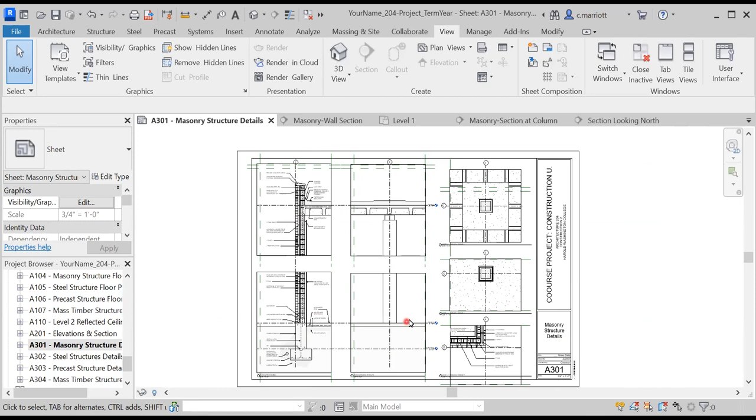In this video, we are going to work on this detail here, the section at the column. It won't have nearly as many notes and components and detail as the wall section, so this shouldn't take quite as long.

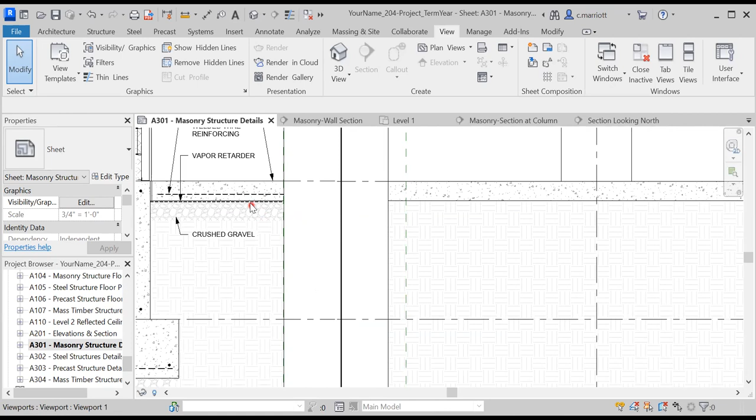Some of the things we're going to do are bringing that welded wire mesh across and adding the reinforcing that appears in the waffle slab. Same thing goes for the bottom, we'll pull across the gravel, vapor retarder, and welded wire reinforcing that's in the slab. We'll also show the pier beyond. It's already drawn, but it's hidden behind the topography, so we'll make that into a hidden line. There will be maybe a few notes, but not many for this one.

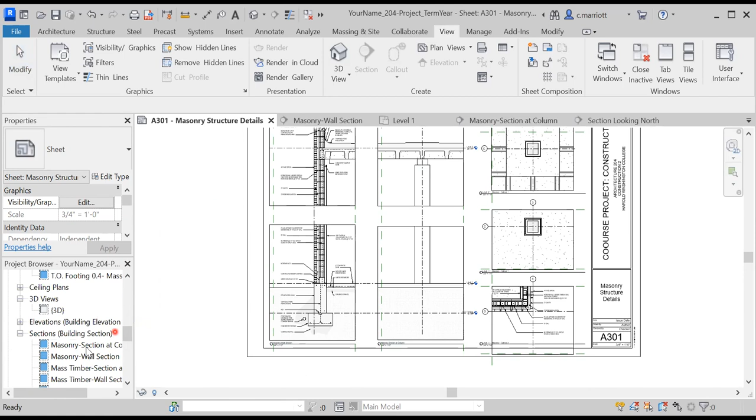So I'm going to go to the section at the column. Actually, before I do that, let's go to the wall section here, and maybe we'll try to copy a few elements from this view and see if we can just bring them right over. I'm holding down the Control key.

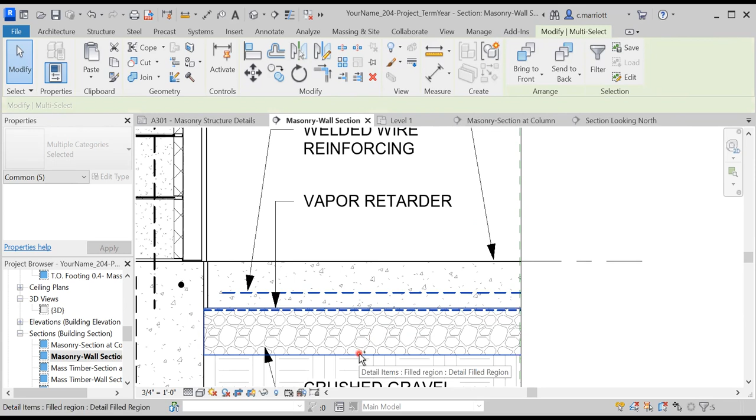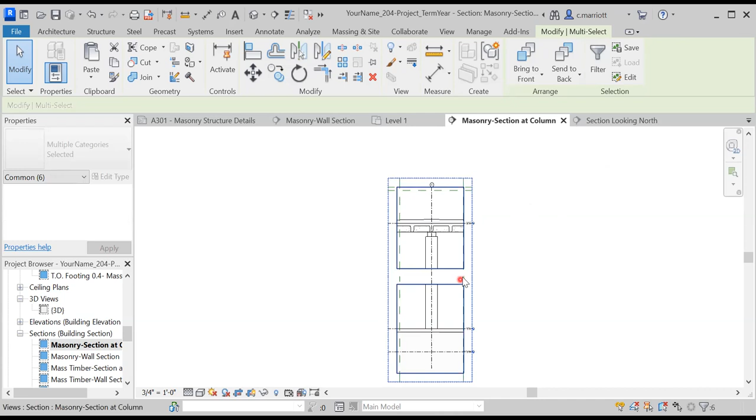Control C, and we'll try to move that over to this other detail, Control V. So they may be here, but they're hidden behind. I'm going to try to paste them into the detail right here. Okay, there they are. Now I can move them into place. That will save me a little bit of time.

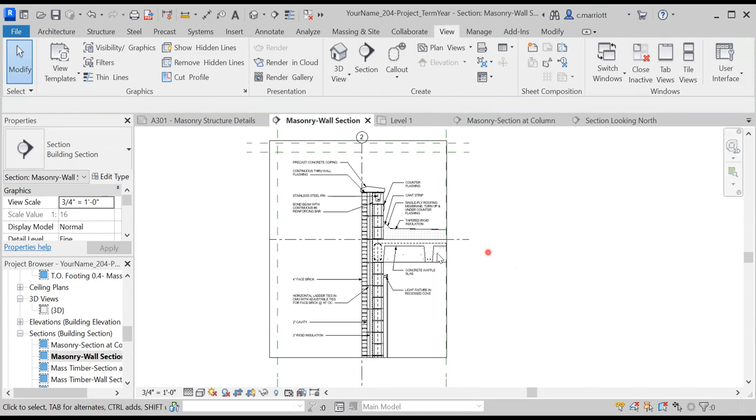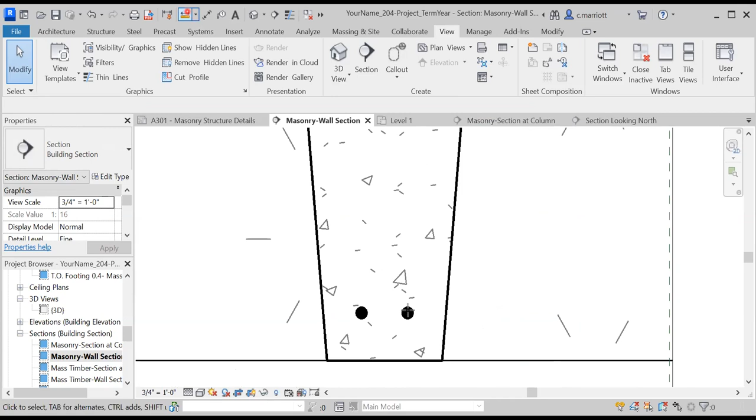I'm going to go back to the wall section and just check some dimensions to make sure that I'm placing them in the same positions. So let me measure that again. Snap overrides perpendicular. I put them 2 inches above here, and we can check this as well. I think it's the same, 2 inches.

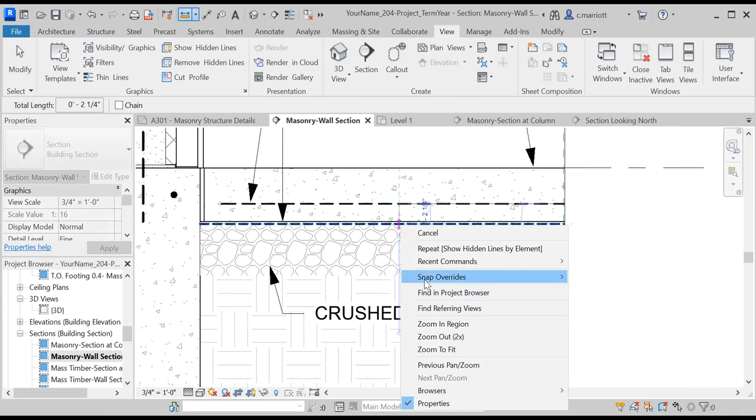And I will check my welded wire reinforcing down there. That's also going to be 2 inches. Okay, so now I'll go back to the section at the column and I'll move these into place.

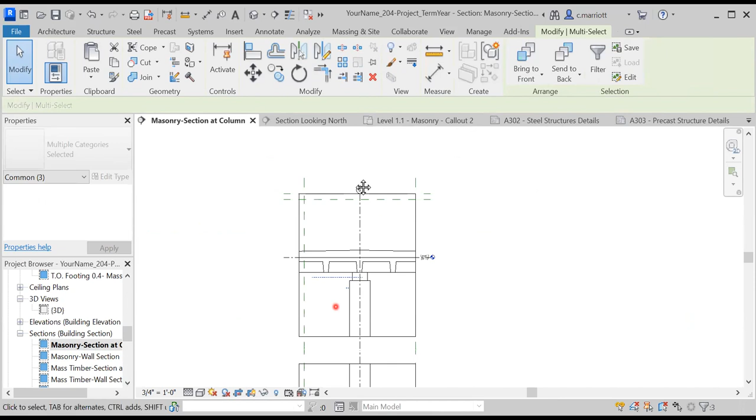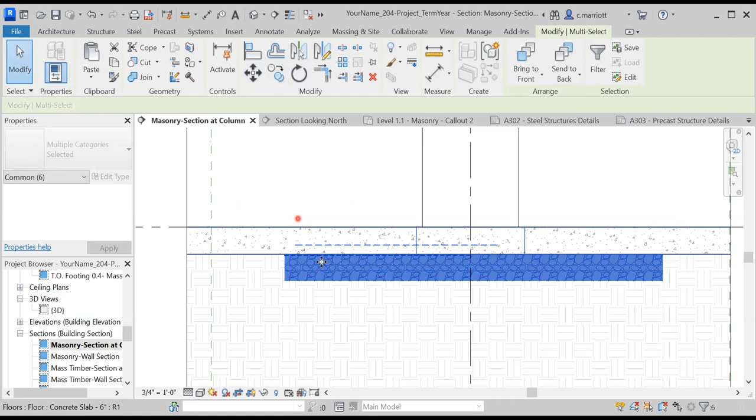So let's see here, maybe I can do them all at the same time. If not, I'll come back and pick them up individually. Okay, move from endpoint, snap overrides to perpendicular, and then I'll move them again 2 inches up. Now I should be able to stretch these past the crop lines.

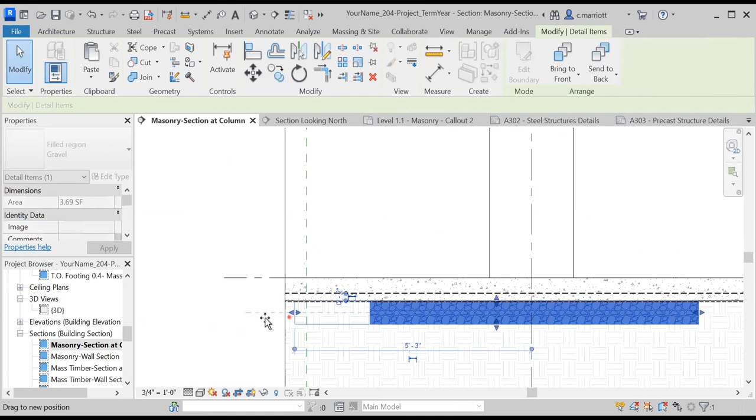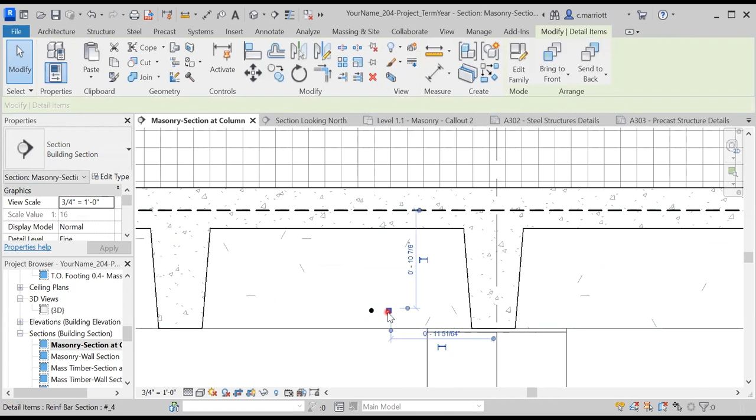Going up to the top here, now we repeat that process. Reinforcing. Move. Moving them to column.

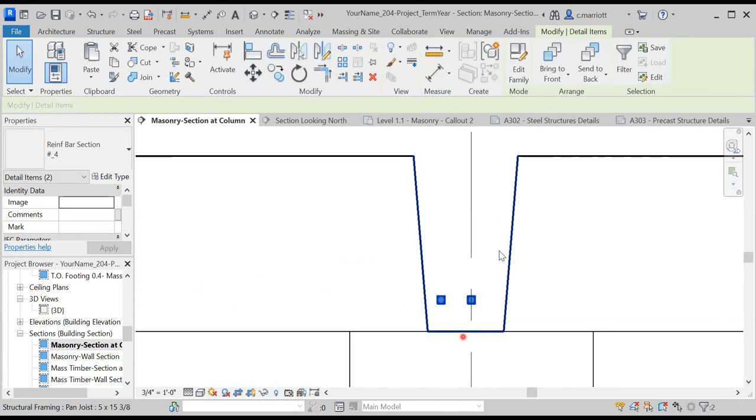For some reason, my member here is not centered, so I'll have to figure out what the problem is with that one. See if I can move it from here. I'll have to unpin it and work on that.

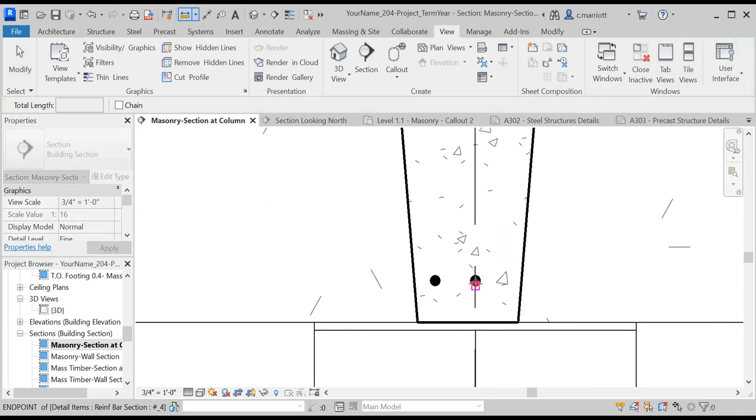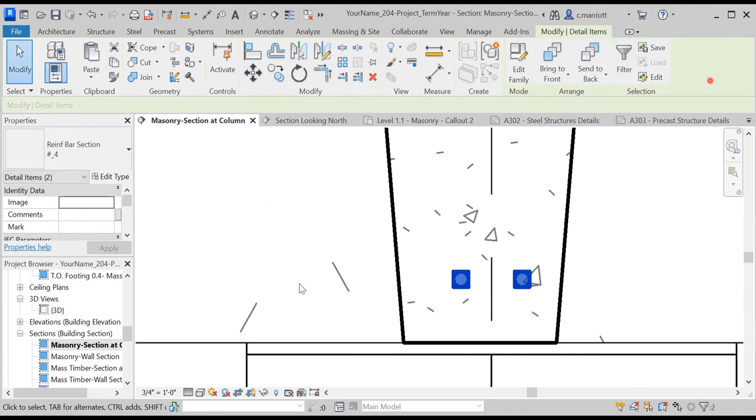Okay, let's measure between the two. Let me pick a center. So I'll just move them over 1 inch so they'll be centered on the column line. And I'll come back to that business about centering the actual structural member properly.

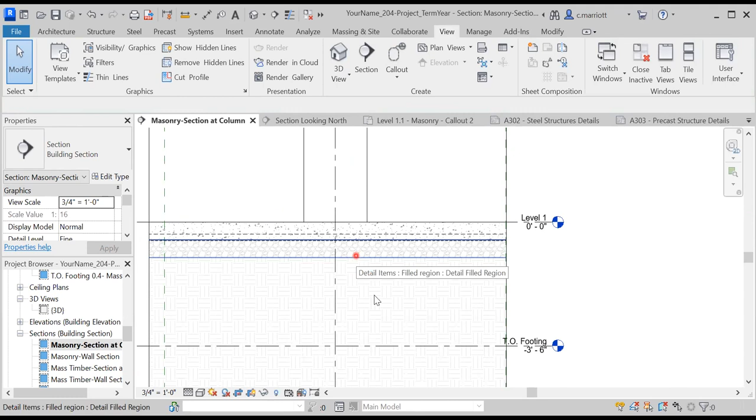Okay, next thing we're going to do is reveal some lines that are hidden. We have a pier that's coming down below this column, and we want to see that as a hidden line. The steps for this are a little bit complicated, but once you get the hang of it, hopefully it will go quickly. First thing I'm going to do is go to a wireframe view.

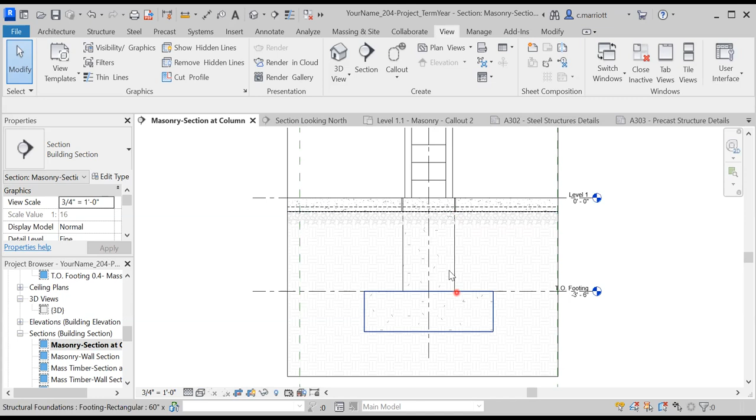Okay, so now I can see everything. So that's what I'm going to show, but I don't want it to be a continuous line, I want it to be a hidden line. So the process is this: you go to the View tab, and under the Graphics panel, Show Hidden Lines.

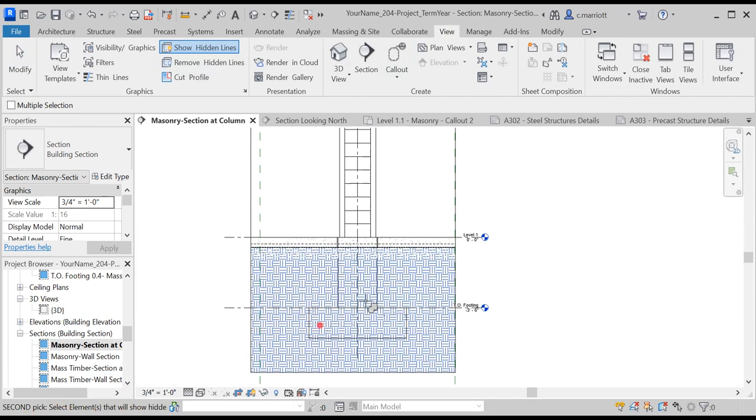So I'll start off with, see if I can tab through and select the topography. I think that's the topography, yes. You pick that first, and then second, pick the element that will show. So I can select this pier, okay? And then when I go to the hidden view, I can see that it's now visible.

Now, as you can see, I need to go through the process of revealing those hidden lines behind the gravel fill and also the slab, and I'm also going to reveal the footing. So I'll go through that process again.

I'm going to go back to the wireframe mode, show the hidden lines, and hit tab until I hit select. Okay, I'm not sure what it picked, so let me repeat that. Show hidden lines, and I need to - okay, detail lines, that's what it's found.

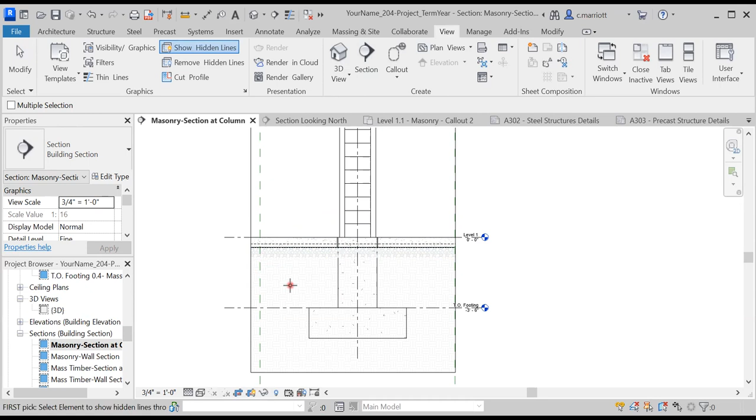If I hit tab again, let's try. It's a little bit of a challenge to pick. Let's try the detail lines first, and I'll reveal this. Okay, so I'm going a little bit out of sequence, but now you can see it's going through the gravel. I'll just finish this one, and then I'll figure out how to select that topography in a moment.

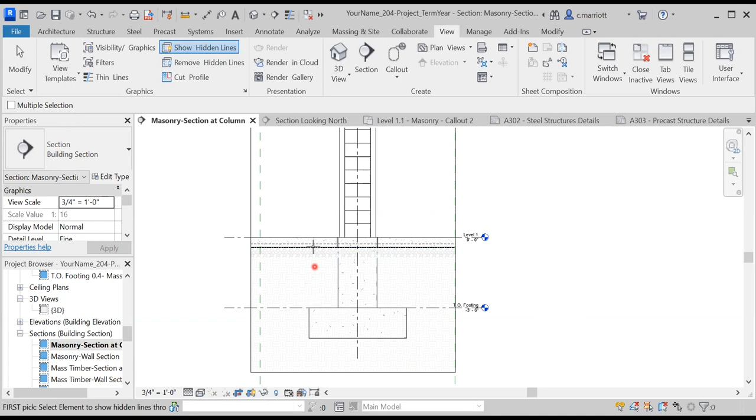But let's see here, View, Show Hidden Lines. Let's go back to the wireframe first. Okay, View, Show Hidden Lines. I'm going to select the concrete. Now I'm going to select the pier. And then when I go back to hidden line, I should see that those lines pull through.

So in order to pick this footing, if I had done this first before I had brought the gravel in, it would have been a lot easier to do. It's not letting me select the topography. So what I'm going to do first is click on that gravel layer, hide that element in the view, and then I'll turn it back on.

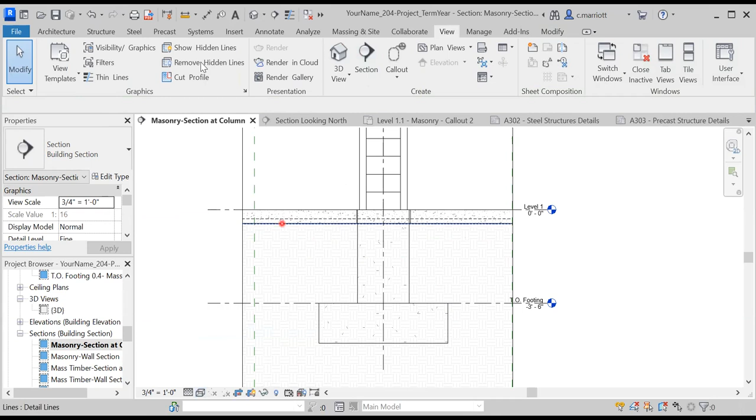All right, so I'm still here in wireframe, and I'm going to go to Show Hidden Lines again and see if I can tab there. There's the topography. No, that's not the topography.

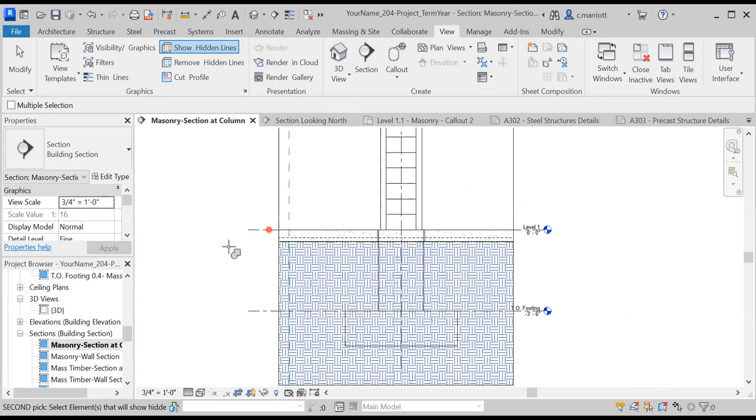Hidden line, concrete slab, topography. There we go. Like I said, a little tricky to grab that. And then I'm going to pick the footing down here.

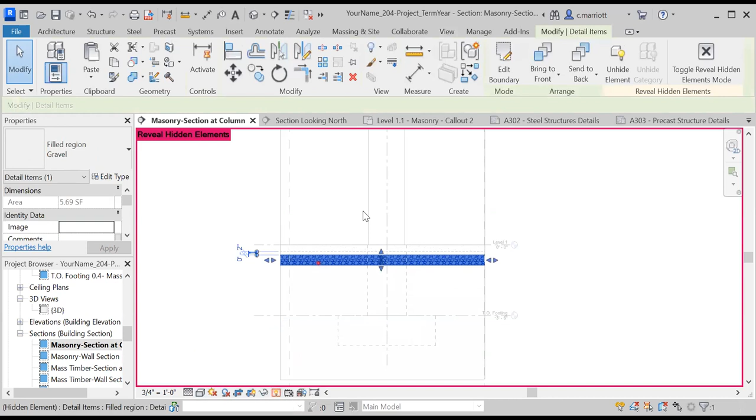Now when I go to the hidden lines, they should appear. And then in order to turn back on the gravel, I'm going to reveal hidden elements by clicking on that little light bulb, select that and unhide element in view. And then I'll deselect that light bulb. Now I can see that those hidden lines are coming all the way down the pier.

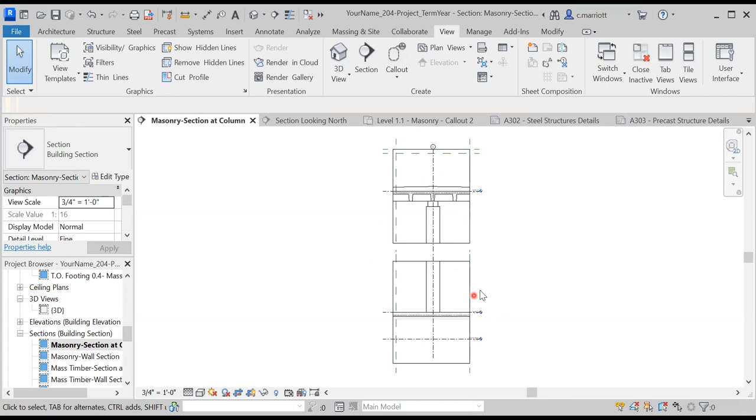Now for this detail, I suppose we could have cut the section through the column itself, but I think enough information can be shown from the exterior of this particular view. So the other thing that I'm going to show is the concrete block behind the drywall.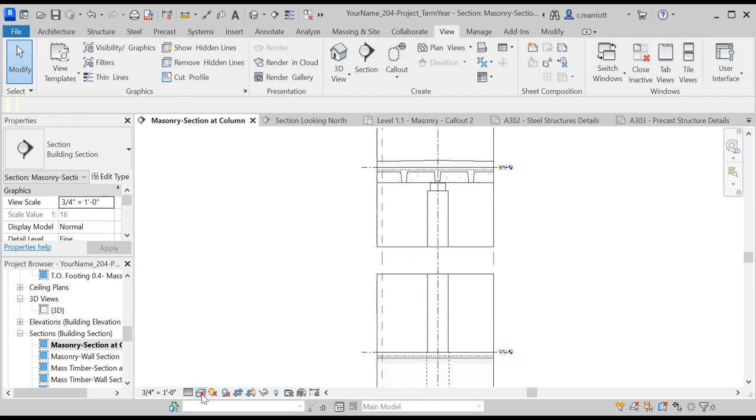So this line up here is going to pull through, but as a hidden line. So I'll repeat the same process. I'm going to go to wireframe, and then I'm going to go to show hidden lines.

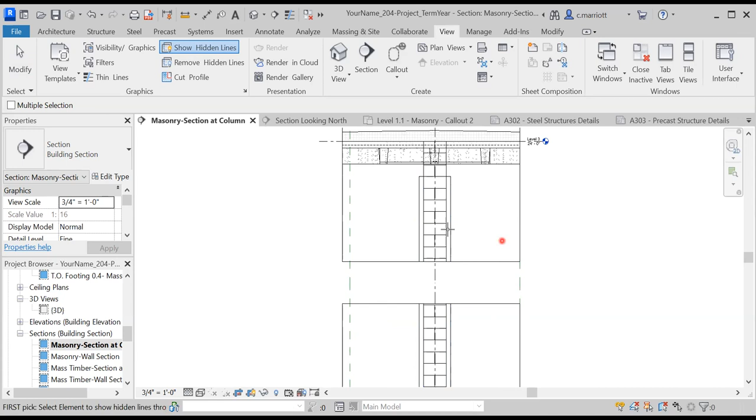I'll pick that drywall, the furred wall. And then for my second pick line, I'll have to do this maybe in 2 phases. I just picked the line on the right, and now I'm going to go to hidden line. So you can see that line now appears.

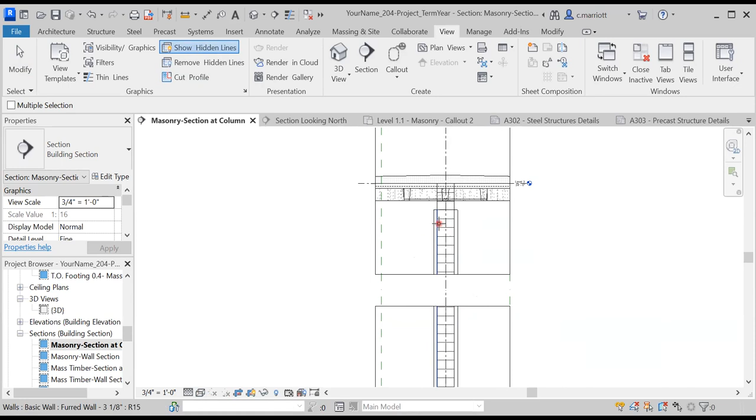Go back to wireframe and repeat the process, show hidden lines, pick that front furred wall. For the second pick, I'm going to select the edge of the concrete block. And now when I go back to hidden line, I see both of them.

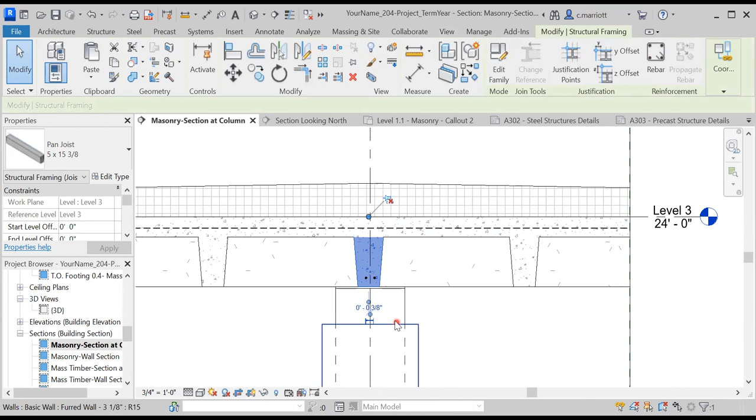As I had mentioned before, this structural member is not centered on that grid line, and it should be. So what I'm going to do is pick it. I'm going to unpin it, and I should be able to resolve this. If I click on the dimension and change it to 0 inches, it will recenter.

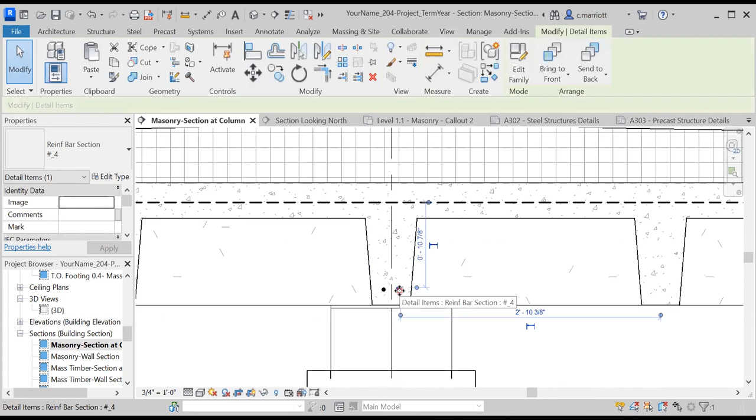So you can check your reflected ceiling plan detail and make sure everything is kind of located where it should be. For these two, I'm going to make some more copies. Let me check, well I can't remember what was the spacing for those. It was 3 feet.

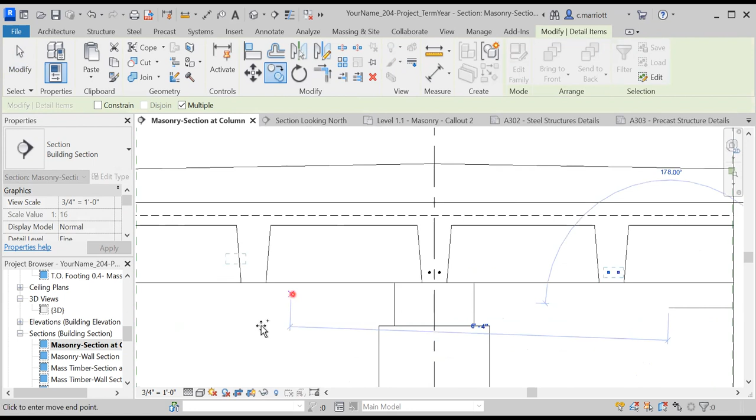So I'm going to control copy, 36 inches. That one looks like it's off too. And then this group, I'm going to move over 72 inches. Yeah, it looks like all of mine are just slightly off.

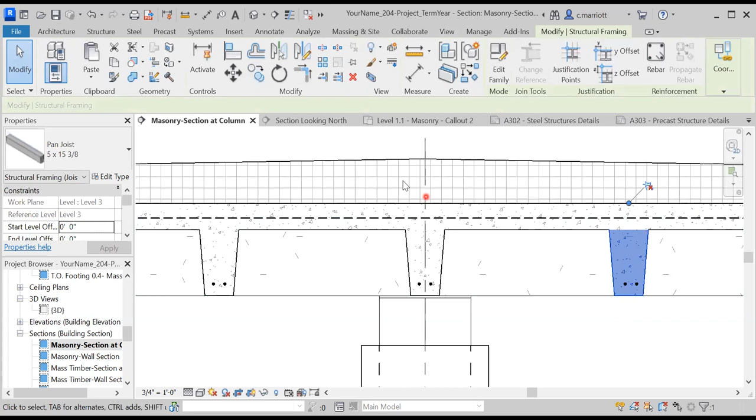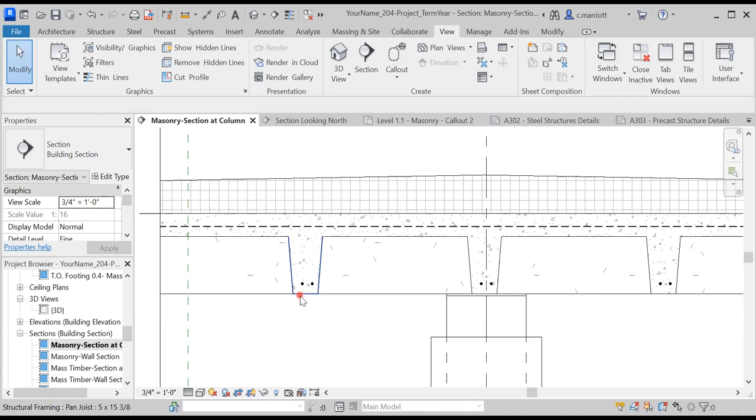And you can repin them so they don't move around. I see, okay, I have a feeling that I'm going to need to leave them unpinned because you can see when I repinned them, they went back to their original position. So I don't think that will cause any problems, but if it does, we will address that later.

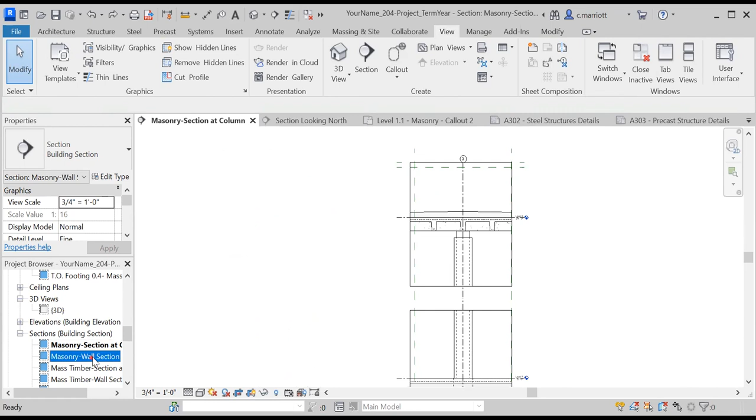Okay, so I think we're ready to add a few notes to this one. I think if there's any additional things I should add, I probably need to have a medium line that represents the membrane. So I'll just add that to the section.

I'm going to go to annotate detail line, just so there's a little bit more heaviness to it. Let's do snap overrides nearest. And I'll just go to that far edge. If we have to extend it, we can. And let's see here, we'll go to an end point, perhaps.

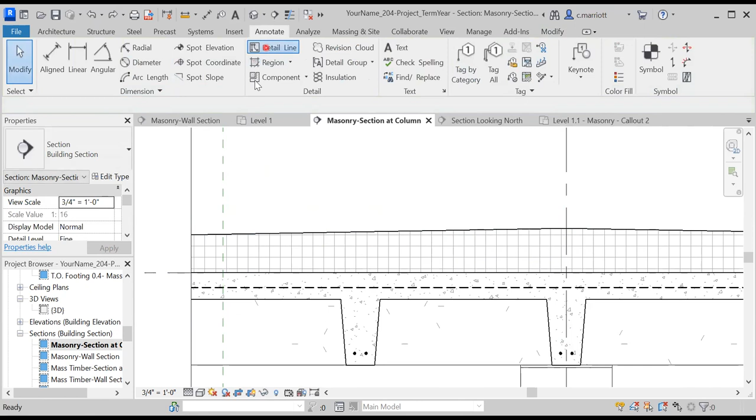Let me repeat that, something did not go as it was supposed to. Nearest. Snap overrides endpoint. And I'll also go to a nearest point. Get it as far over there as I can.

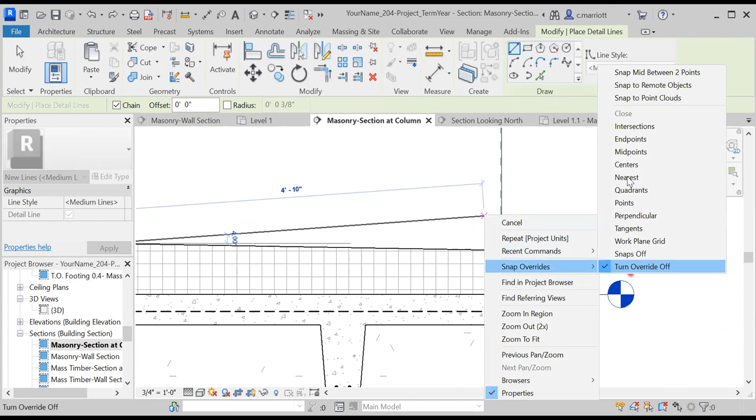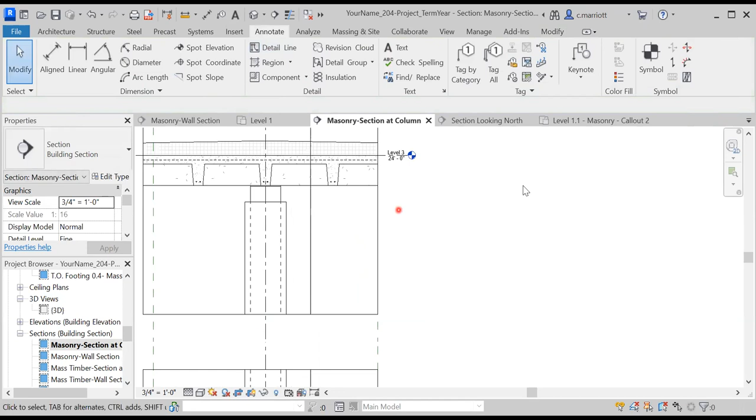Okay, so it should print just a little bit heavier. Now we're ready to add the notes. I'm going to make a guideline for myself for my text, roughly there. And I'll begin adding some notes for the text.

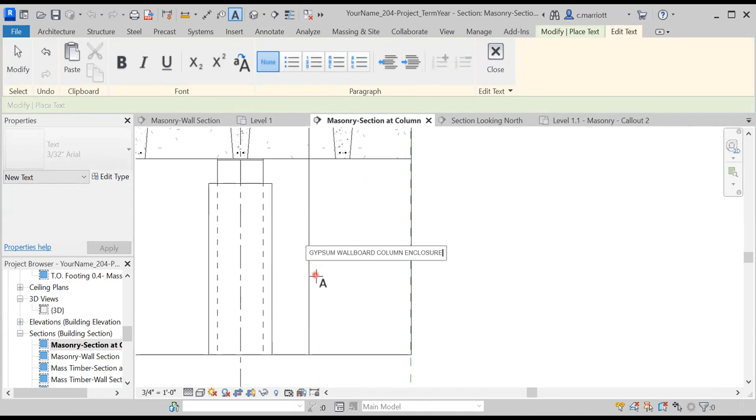Again, it's the same 3/32 of an inch. And this one is going to say, in all caps, gypsum wallboard column enclosure. And I'll stretch this so it is within my cropped region here.

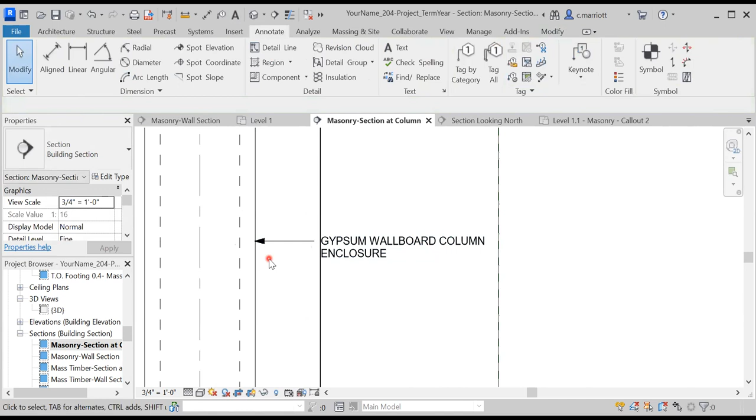And then I will add a leader and point to that edge right there. Okay, I'll make a copy of this one, and we'll bring it down into the earth texture, and one more here.

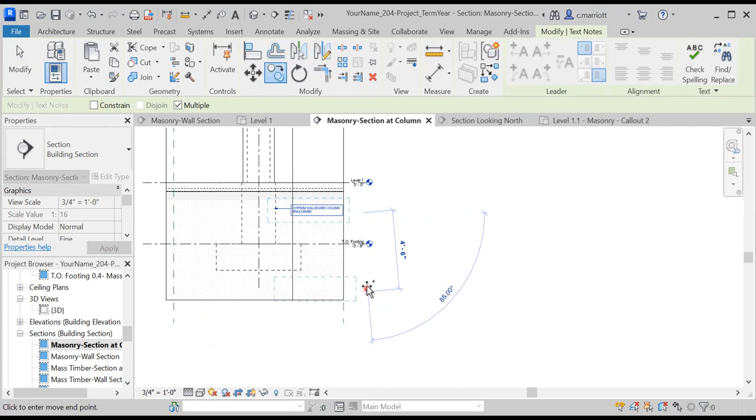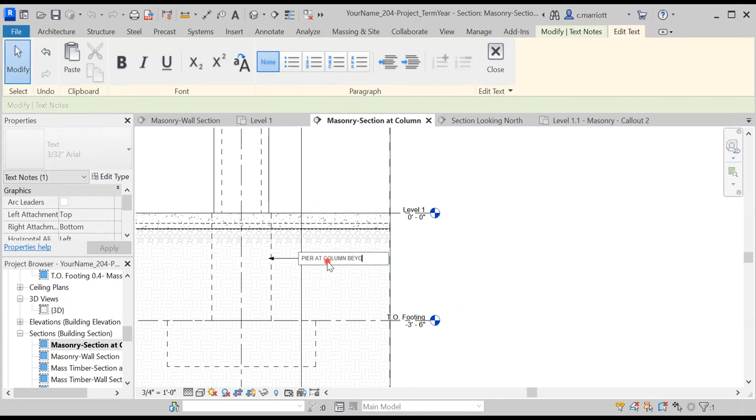This one is going to say pier at column beyond. Right, and that one will bring it back to the hidden line.

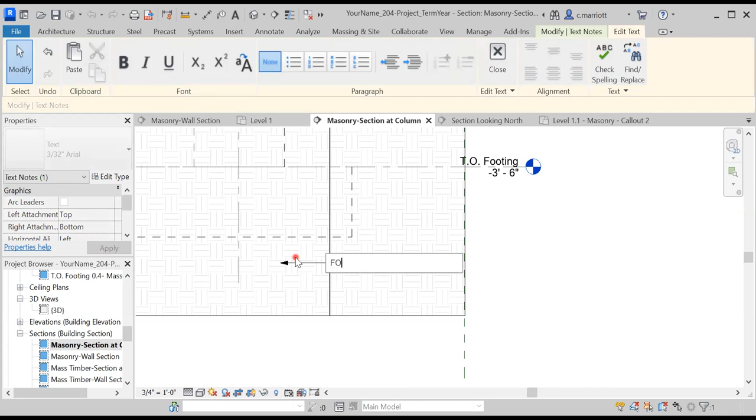And this one here, I'm going to move this one up just a little bit. This one is going to say footing at column beyond. We'll point to the hidden line.

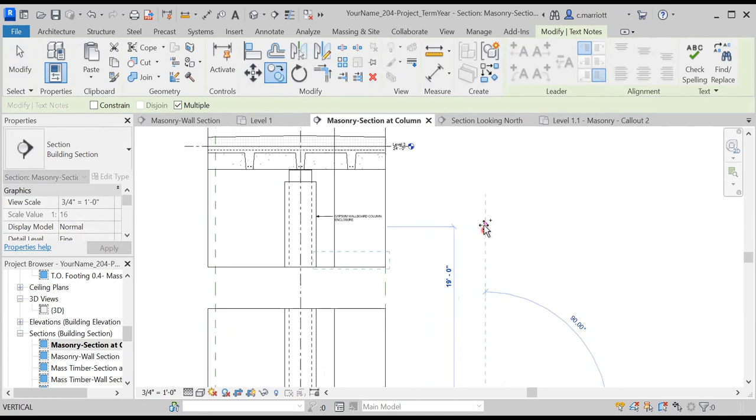And bring this one out straight. One more note we'll add, and we can put that right below the gypsum wallboard column enclosure.

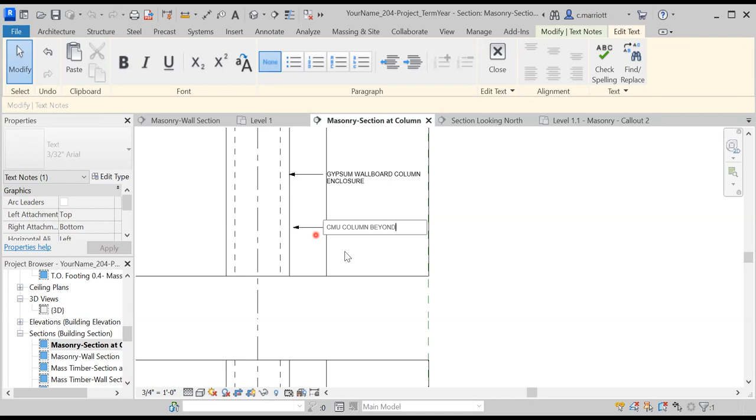We'll call it CMU pier or column, we can call it a column beyond. And we'll point to that hidden line. Okay, so that's it for that one.

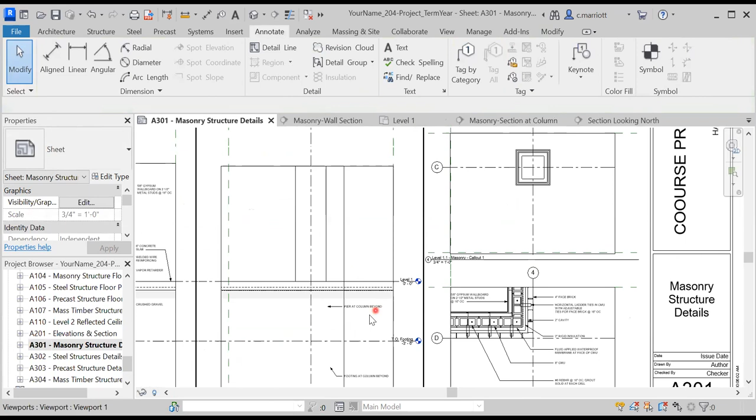If we go to our sheet, you know, the reason we don't need to notate all of these things is because they're already picked up in the wall section. So we're just showing things. So I'm going to get rid of that guideline that's there, and this part of the drawing will be done.

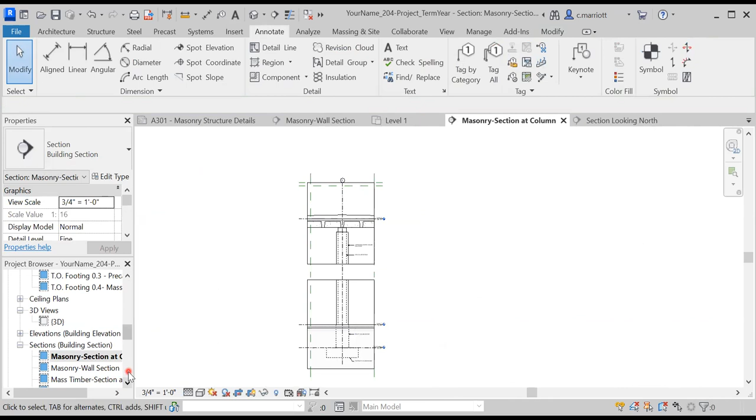Go back to that sheet. Okay, there we go.